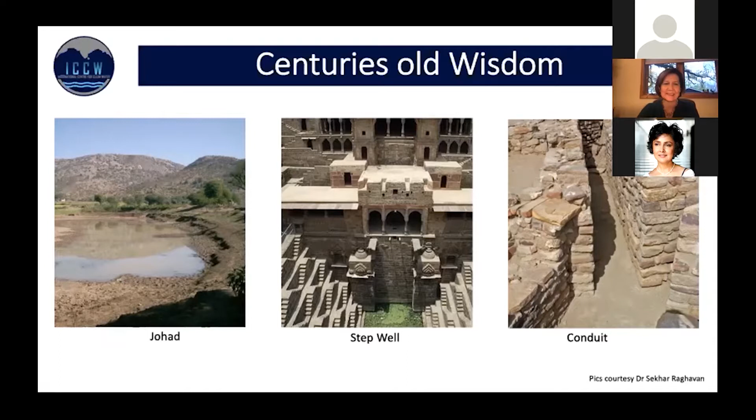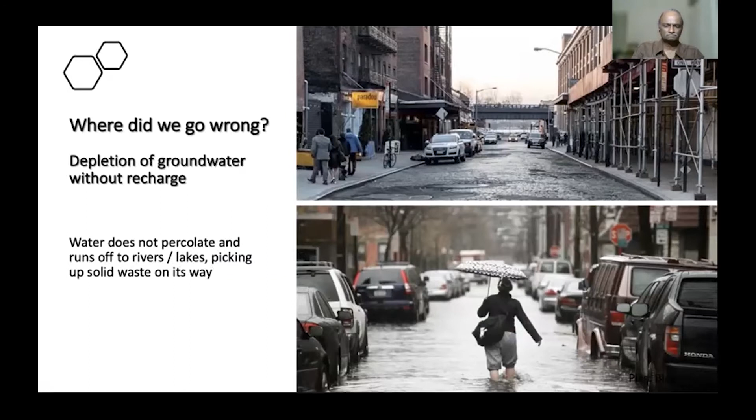Where did we go wrong and why did we end up like this? One of the things is depletion of groundwater, because we do not have a plan for capturing the only source of clean water, which is rain, and preserving it for our future use. This is not a technology problem. It's a thinking problem or a mindset problem. Otherwise, why will we build pavements that do not allow water to percolate, but allow it to run off into lakes, rivers, or the sea? And if the runoff were to be a clean river or lake, it's okay. But our lakes and rivers are polluted. And this rainwater runs there and gets polluted also. So this is what we are doing.

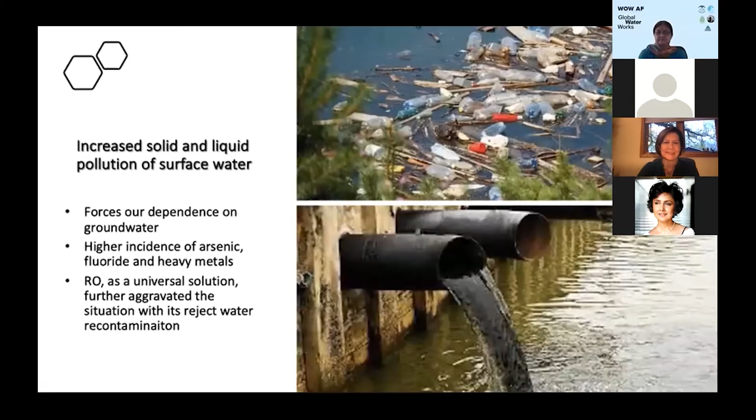We are allowing clean and pure fresh water to fall down and run off onto the lakes and rivers, or water bodies, where we pollute them with solid waste and liquid waste and whatnot. And we are therefore drawing more and more groundwater to sustain ourselves. And our dependence on groundwater is increasing, which means it is depleting. It is not being recharged, as we just saw. So we're going deeper and deeper to fetch fresh water, where we will find life-threatening contaminants, whether it's fluoride, arsenic, maybe even uranium today and other heavy metals. So this is, on one side, the problem we have created.

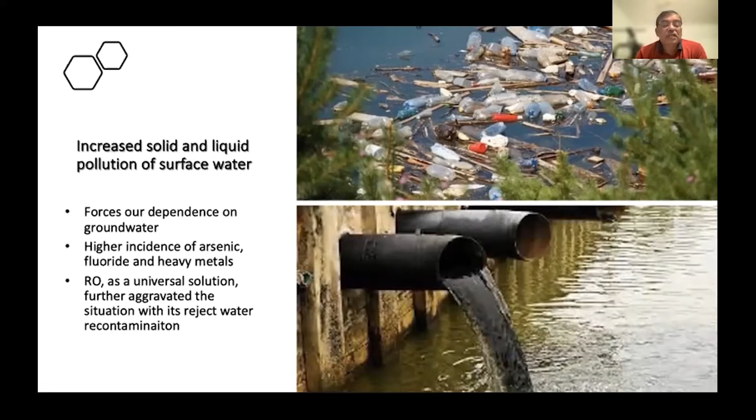And also, we have tried to fix it by corrective actions, like reverse osmosis. I think that's more a corrective action than a preventive action, because it takes care of what we drink, but it does not take care of what we discard. So over the decades, RO, though it's a fantastic technology for providing clean water and it has saved several lives, has inadvertently added to the significant deterioration of groundwater quality. So this is the scenario that we are facing today.

But as I said before, I see a huge opportunity: the water cycle. See, unlike fossil energy, water is a naturally renewable resource. It is getting renewed every day as we live, as we speak.

All we need to do is not allow it to run off into the sea and then spend big money on desalination plants. I think it's silly, if you ask me. So even a city like Chennai, I think it is in the world map as one of the water stressed cities. And recent times it has faced severe problems even 2 years ago.

But if you do a quick back of the envelope calculation, what you see is for the area that it has and the annual rainfall that it receives, it is getting far more water than it needs. The demand is even 70% or 80% of what it receives on an average. So somewhere something is missing. There is abundance, and that is something we need to keep in mind.

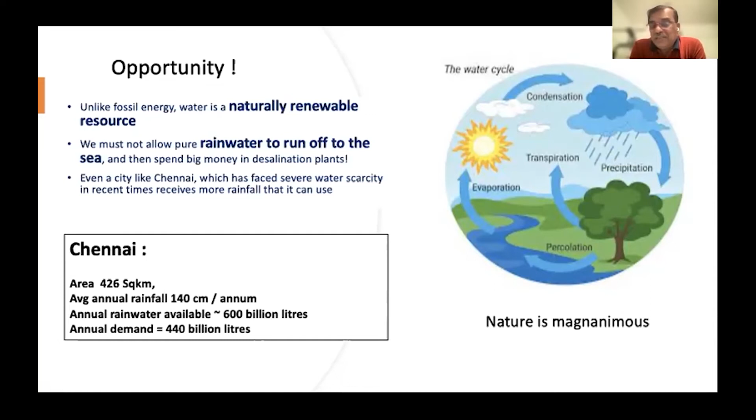Most people talk of water conservation, and I think even Dr. Usha had talked about water conservation. Yes, all of us must conserve and use less water. But I think that if we manage water well, there is plenty available for us, and we can all be a little bit more liberal in its use. And that's what I'm looking forward to. So this is something that I wanted to share.

And I see things happening, as Usha mentioned, community participation is the key. Because in the 2.5 years, ICCW is a young organization, and my association with water intensely has been only from ICCW. Prior to that, I was doing several other things. But what it has taught me is that our water management is in silos. Though with the Ministry of Jal Shakti, now things are breaking down and becoming unified. But still, at lower levels, we are working as silos, and therefore we are unable to see the bigger picture.

It's green. So what we are missing out is how do we make water percolate? And can we have greenery? Can we build up pavements and various other infrastructure to receive water directly and take it to the ground, replenish it so that we can use it in the future? If not, at least depending on the aquifers, it can even run off to catchment areas from where we could draw it. But those catchment areas must be kept clean and free from pollution.

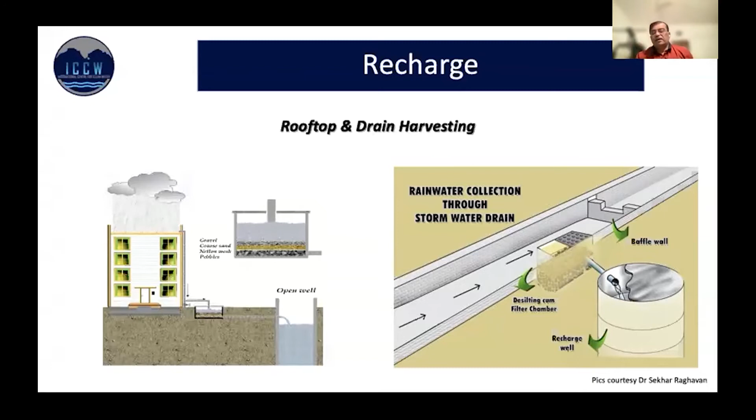If we can do that in ICCW with IIT Madras, we're looking at how do we validate these things? How do we bring it into a curriculum of every student today, whether it's in school or college, and a separate elective subject for engineers, so that when they pass out, they are very much aware of what to do and what are the do's and don'ts, and are also equipped with the know-how of how to do it, and also learn from the past. So this is something that I see as a great promise.

Alternately, Mr. Indukant Ragade, he was there in the talk 2 days ago. He's done a phenomenal amount of work in Chennai as part of Alacrity Foundations, where it's very, very simple, low-cost techniques of recycling greywater. Greywater is water that comes out from our sinks, showers, and washing machines and can easily be separated and recycled. It's 95% clean water.

And there is no need at all to send it to sewage treatment plants, but we are doing that. So we are overloading the sewage treatment plant, making it mostly inefficient and losing a huge amount of clean water in the process.

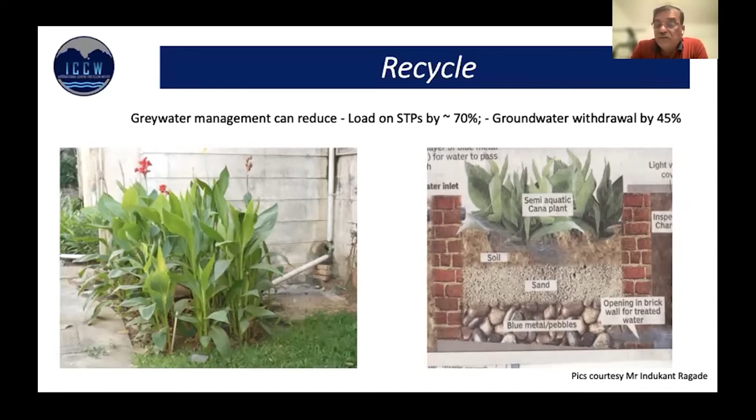So just a bypass, just a T-valve, take it to the ground, have these Canna indica plants, and nature will do the trick. It will send it to the ground clean and we can reuse it. And unlike rainwater, greywater is available around the year. 12 months a year, you have greywater coming out. So there's no seasonality there.

Reuse is something that many citizens are practicing today because they have been forced into a corner on many occasions. RO reject water is being used, and I think it's a good idea. It should be used as appropriate, but there has to be some knowledge, because it can cause some degradation of property if the high salt content is used to clean certain parts of where we are living. It's a good idea to do it in a more knowledgeable way, and many citizens are already doing this.

Reduce is another one which, as I said before, doesn't mean compromising on cleaning efficiency or losing out on some performance. There are water faucets available today. Technology has gone far enough to trap ambient air and send it as a jet. So 90% of the force is air and 10% is water. And that force is enough to clean. So with 10% of water, we are able to clean more effectively than 100% water.

And moreover, there are also systems which come with ozone instead of air, which may be a little expensive, but that can disinfect also, which means you don't need to use soaps. And with clean water, you could disinfect, and therefore the grey water becomes easier to recycle. So these are some of the thoughts I want to leave with the people. I will touch upon some more technologies, which we can come back to as we go along. I would not say low tech, but low cost and easily doable projects that I've listed here.

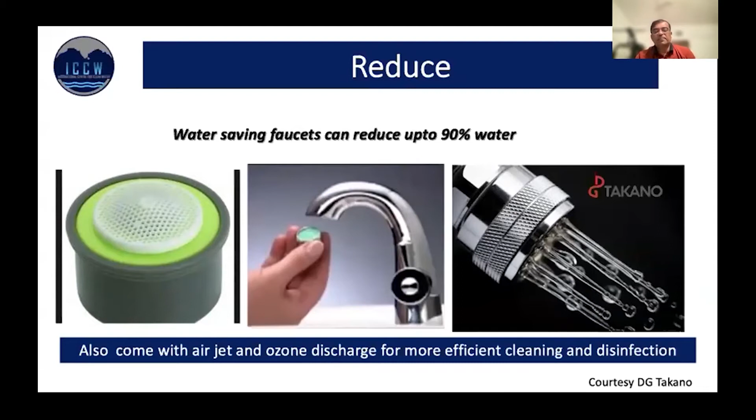We can look at some little more higher end technology which can make a difference. One of them is an incubated company here, which is doing capacitive deionization. What it does is simply use electrodes to remove ions. And in the process, we're able to retain those ions we want to retain, which are calcium, magnesium maybe, and reject those which are harmful. All this is done with very little energy usage, and this unit itself has a very long life. But it has a certain limitation today in the amount of dissolved salts it can handle. So there is some R&D that is required.

However, it's been phenomenally successful in the villages, and we are looking to bring it to cities where instead of RO water, where for every 1,000 liters we may need to draw 3,000 liters, here 1,200 liters of raw water is sufficient for the same output. And as I said before, it runs on very low power, so it can be entirely run on solar and is very easy to maintain by anybody. And as it retains minerals, it's also healthier to drink. So this is one technology that's available for city dwellers to improve their water quality.

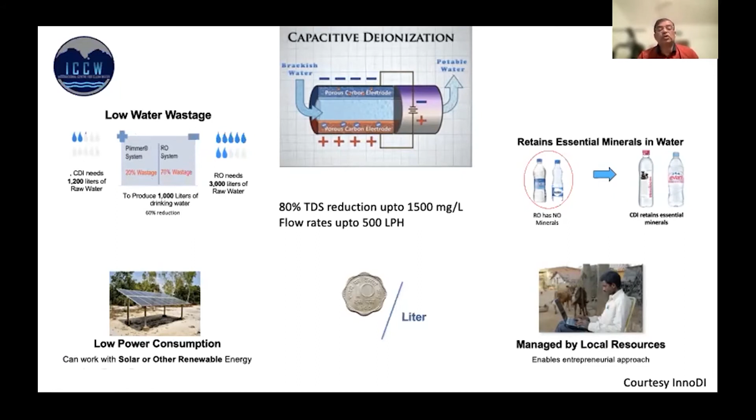And there is another emerging technology which is even more exciting, which is called dealkalizer. We all suffer from hard water, which has temporary hardness as well as permanent hardness. Alkalinity is the term used to measure the hardness in the water. Typically alkalinity is removed by ion exchange resin, but ion exchange substitutes calcium with sodium possibly, so the TDS, the dissolved salts, don't change. This technology replaces calcium with hydrogen, and therefore your TDS comes down. So it not only removes hardness, at the same time it reduces the dissolved salt.

This allows us to develop a beautiful solution, which I've shown here. You take raw water, put it to a storage tank, do your pre-treatment, sedimentation, carbon filter, etc., put it to a tank, run the dealkalizer. It removes hardness completely and also reduces TDS. Now you run it to a low pressure RO, extremely low pressure RO, which will reject 90%. And 10% will pass through, which is excellent water for drinking, which is probably what people would like to consume. 10% of all the water is consumed for drinking or cooking.

And the 90% reject actually goes back to the tank. And because it is all pre-treated, it can go here and again complete the loop. So therefore, there is zero reject of the RO, plus you have clean drinking water. And for the rest of the usage, this water need not 100% go here.

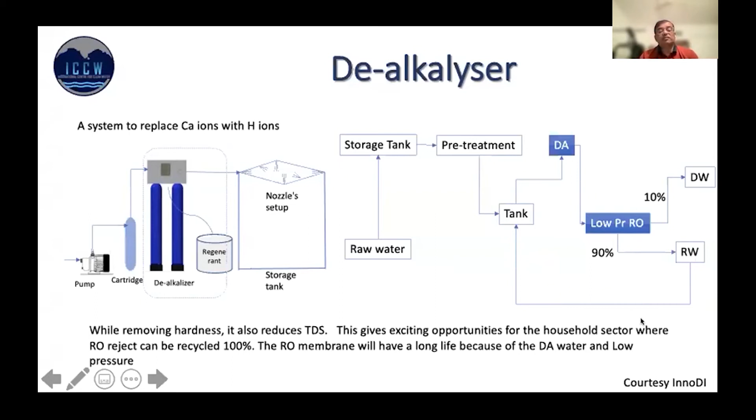It can also go for washing and other applications, which is soft water, which is what they look for. So we see a huge opportunity to develop these kind of technologies in the future.

Now, another one I want to touch upon is using nanotechnology, which is for removing heavy metals, where you don't again need to waste water. As you can see, nanomaterials have very high surface area. So they have a very high absorption capacity of the metal that they are absorbing, and they last for several years. And because of the ease with which they absorb, there is no pressure required as the water flows across them. So which means from 10 liters per day to 1 million liters per day, this system will work.

There's no power required. It works with gravity. As I said, the media lasts for several years. The cost is not even 2.5 paise per liter, much less than 3 paise. 1 paisa is exactly 1/100th of a rupee. And there is no wastage of water other than the back flushing we do.

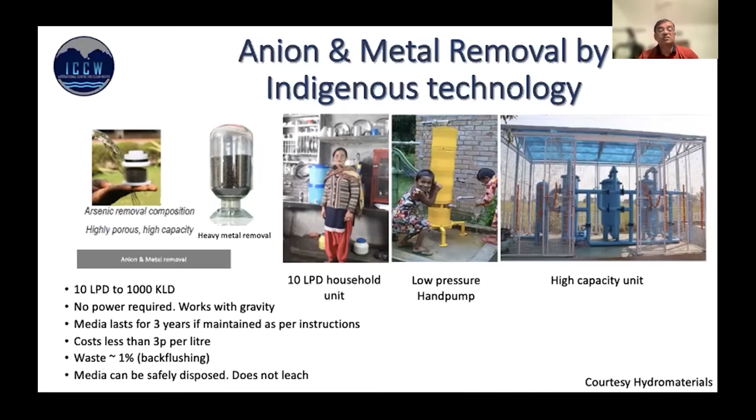And the media itself keeps the arsenic, hangs on to it tightly. So even if you were to dispose after 3 years, it will not leach out and will not recontaminate the ground level. So this is another technology that I think is available for people in those parts of the world where arsenic and heavy metals are contaminating.

Atmospheric water generation is not new, but there are continual improvements taking place in the energy consumption, because that is where it is making a difference today. I would say it's just a single breakthrough away from eradicating drinking water problems for the whole world. In one stroke, it can eradicate the drinking water problem, because huge amounts, trillions of liters, are there. All it needs is to figure out a low-cost way of converting it. We have a high-cost way of doing it today.

But the beauty of the system is it produces water at the point of use. You don't need to transport it. So no diesel required for transportation, no packaging required, and there's no wastage. And there is no footprint. I mean, the water footprint is negative, or positive, whichever way you look at it. It's not depleting ground or surface water. So this is available today as a product.

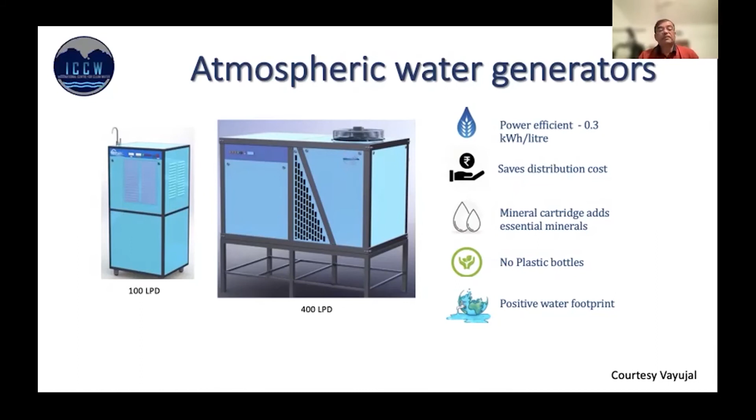Now going on to water which is used water. People don't call it wastewater because that gives a connotation that you can waste it. The terminology used by even the Tamil Nadu government is used water. So STP is one major headache in most parts of the country, because whatever designs are there today, they have certain limitations in terms of maintenance that has to go into it. And with poor maintenance, it deteriorates and it becomes a vicious cycle.

New technology, these are startups. ECOSTP is a Bangalore-based company. So they have used biomimicry, by understanding what's happening inside a cow, which has 4 stomach parts. And this has no moving parts at all, and can be kept completely underground. It requires no maintenance, it's odor-free, and has 0 operating cost. It's an elegant system. There are several such.

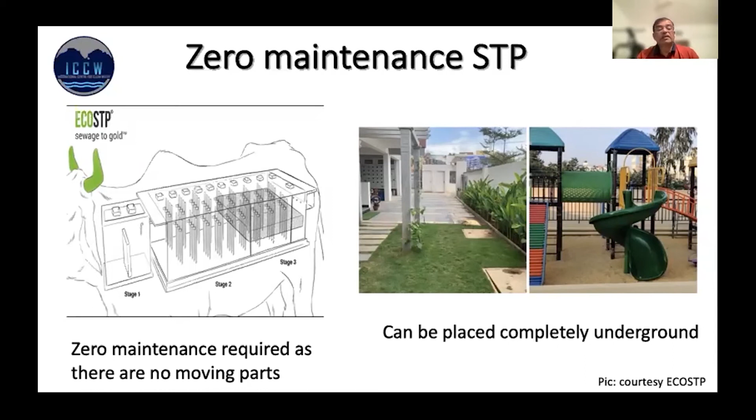I'm just picking up one to show that these are available, and these can be introduced into our cities. There may be a little capex, which is on the higher side, but everything is not easy. So there is some cost benefit that has to be considered. Similar technologies are there, which are circular economy. Another way is taking wealth out of waste.

So we have startups, students who have yet to pass out, or some of them just passed out, taking urine and converting it to fertilizer and giving the clean water back for the maintenance of public toilets. So this is a brilliant suggestion which pays for itself. There's no need for anybody to invest. Even the person employed there can get paid.

Similarly, there are what they call toilet to tap treatments of STP water, which can go all the way. And I'm sure Israel and Singapore are doing it. In India, it's a mindset issue. But at industry level and various other opportunity areas, such technologies can be put to use. So we have covered a range of technologies for clean and recycled water.

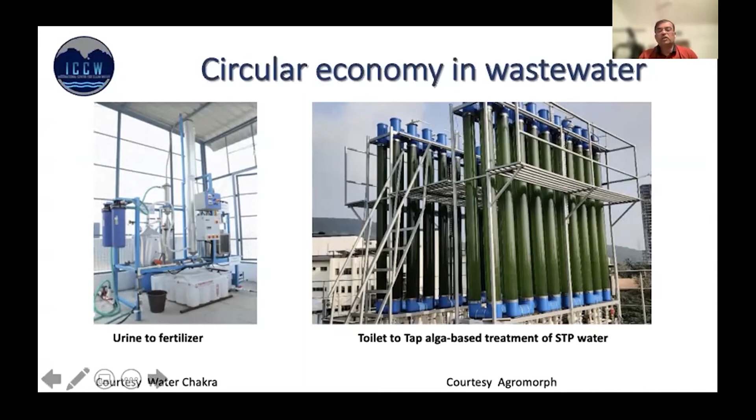What I want to talk about now is how do we empower citizens, involve them, and get them to participate. One of the things that we at ICCW are doing is developing extremely low-cost sensors. And we are empowering citizens to take responsibility and leadership, because we are giving them the charge. We are saying, take these sensors, go to the field or wherever you live, collect the samples, and put it into this device.

It will instantly give you about 7 parameters today. It can go to 12 parameters, which gets onto the mobile phone, and it gets loaded in a jiffy onto the cloud, instantly and accurately. So what we are doing is not only getting citizens to contribute to measurement of water quality, they are also getting educated about what is the situation around them.

And they're helping populate a cloud database, which can then be subjected to data analytics for prediction, for measuring the evolution of contaminants and what will happen in the future, and so on and so forth. So the huge wealth of information can come with very minimal cost and with the benefit of educating people as well. We've started this in Chennai city. College students have actively taken part, and it's an ongoing exercise.

So this is an area where I think collective involvement of people can be brought about. And thereafter, once they are involved and they are aware of what's happening, I don't think we can stop them from doing what is needed to be done.

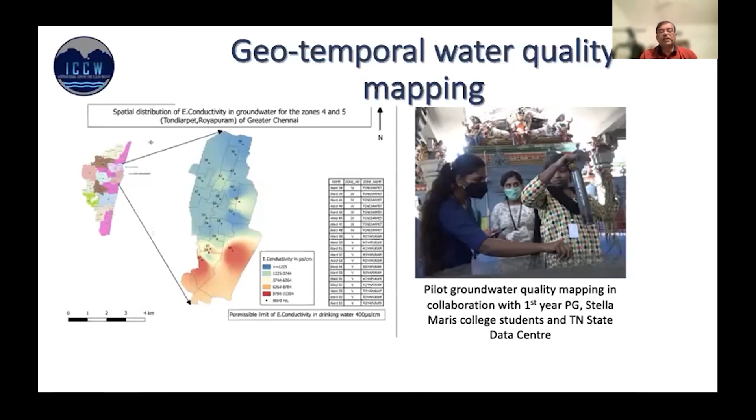So taking this forward, there are more exciting technologies, the next generation which is evolving, because you don't even need to contact the water. You just point a camera or a mobile phone at it, and spectroscopic instruments are able to detect. Obviously, it requires a lot of data science, as each image may have a fingerprint of a particular type of contaminant or a set of contaminants. So once we create all these fingerprints and we are able to map them to contaminants by cross-checking, tomorrow you can put that device into a faucet, and as the water flows, you get real-time feedback of water quality.

You could create a water pen, because the Jal Jeevan mission today is looking at connecting functional taps to every household. Still, people will need to be reassured that the water quality that they get is fit to drink. So a simple pen-like device is possible today, where a green light will say you can drink the water, and the red light means you can't drink the water.

It just measures three things: pH, TDS, and residual chlorine. Because once it's treated, what can go wrong is bacteria contamination, pH changes because of some leakage or mixing happening in the pipelines, or TDS can go up. If these three things are within control, I'm sure this pen can be made available at a low cost of 5 rupees or 10 rupees or even 100 rupees. We don't know. We haven't yet fixed a price on it. We believe that it will have a phenomenal advantage in educating our people and protecting their lives or their health.

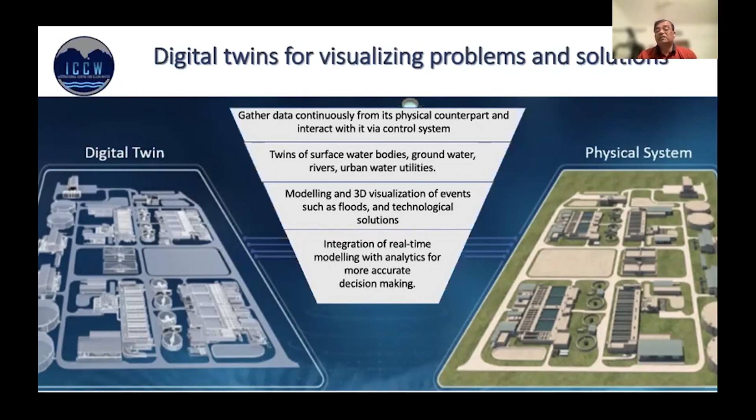And I think it's an exciting time. We can all be part of this. Data will flow like water. This is what we are believing. And data will be water. So whichever way we look at it, data plus water will become the new norm for water management. And so this is how cities will then benefit. Smart cities are already looking into it in different ways. And I know that many companies are working towards these kinds of dashboards for the stakeholders.

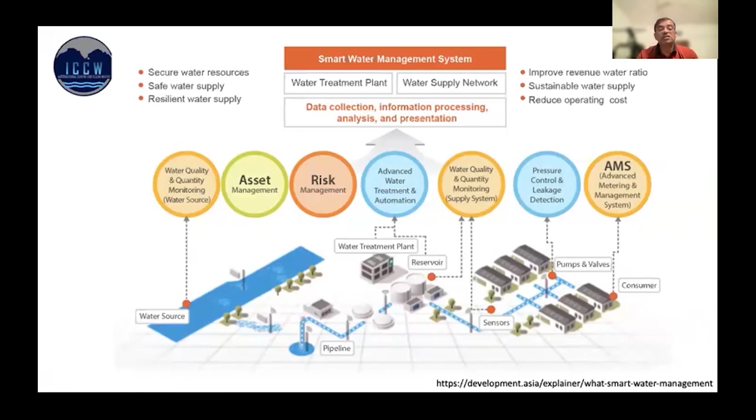So eventually, this is my dream I wanted to share: water is life, and we must have the luxury to enjoy life by using as much water as we want, knowing full well that we have taken care of its future availability and quality in a sustainable way. And in this, nature's help is guaranteed. So if it is possible for us to enjoy a shower without worrying about how much water I'm wasting. Today we are nowhere near that. Hopefully this day is not far off.